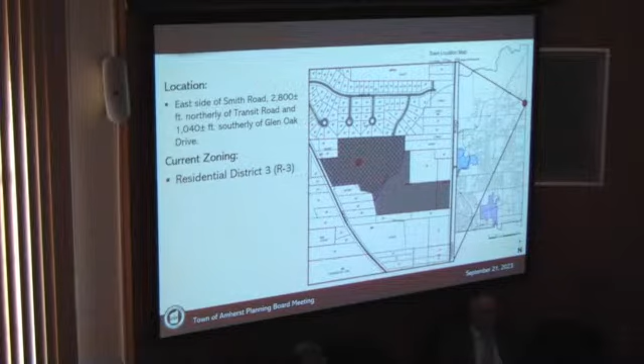You can see this is the site location. We're immediately adjacent to the Ruby Lane, Glen Oak, and Ransom Oaks area, just to the north. The parcel in question is the hatched parcel to the west. DJC Land owns all of that gray area extending out to Transit Road. We will eventually come in for a site plan for the eastern portion, but under consideration tonight is solely the western half of the property.

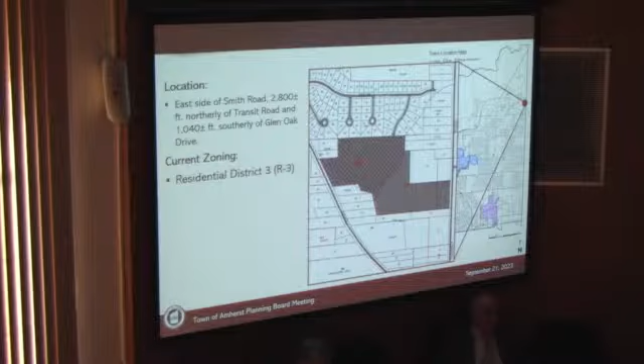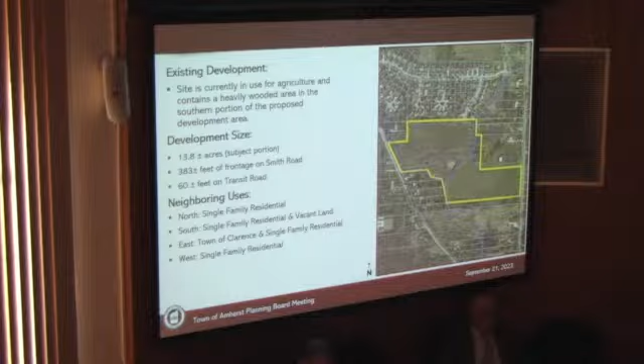This aerial image shows the neighboring uses are largely single-family residential. We're proposing pretty much the same exact thing, so it will be in continuity with the adjacent development.

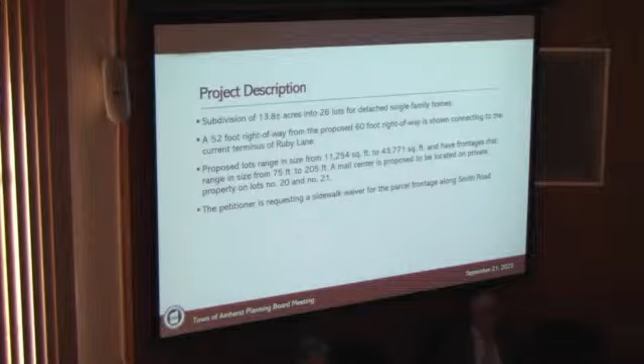This project is about 13.8 acres. We've divided it up into 26 lots, and we'll move along on this one so we can see the layout.

As part of the request tonight, we are asking for a sidewalk waiver. This would be solely along Smith Road. We have sidewalks within the development throughout all the lot frontages, as well as connecting to Ruby Lane. But we are asking for a waiver for the sidewalk along Smith Road, just because there is no existing sidewalk out there at all.

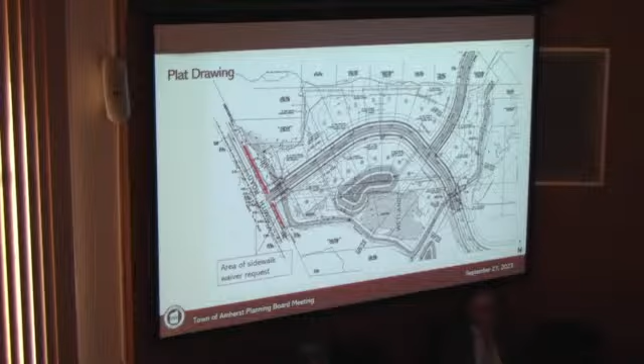We have received support from the town itself, from the traffic safety coordinator and town engineering department. They agreed with our assessment that sidewalks would not be necessary along Smith Road. Aside from the fact that there are no sidewalks on Smith, they also noted there are various obstacles, utility poles, a ditch immediately adjacent to it, as well as other infrastructure that would make installation difficult.

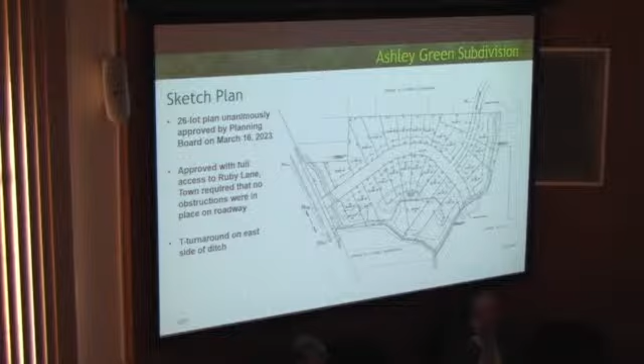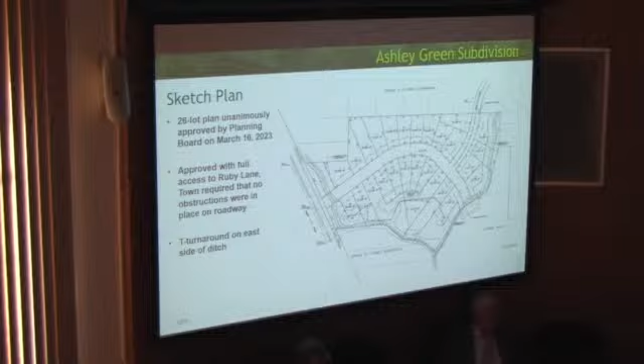So just to take you back, I know this board has seen this plan a number of times through the sketch plan and SEQR stages. It was drawn out before then too with the rezoning. The sketch plan shown here was approved by this board unanimously in March of this year. It was 26 lots connected to Ruby Lane, with the turnaround located just east of the ditch.

If you go to the next one, what we've presented as part of the preliminary plat is pretty much the same exact thing. There's really no difference between our sketch and our preliminary plat other than the fact that we've gone through the engineering and made whatever minor tweaks we've needed based on the proposed infrastructure.

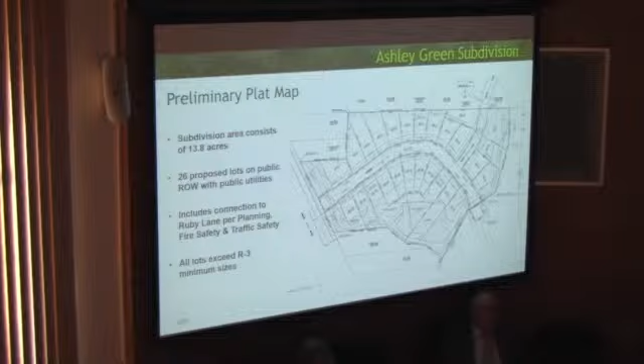You'll notice that the right-of-way at the ditch has been expanded a little bit. This is to accommodate the culvert so that both culverts are wholly within town public right-of-way areas, not going onto any private property. This does include the Ruby Lane connection. That was a point of discussion through the sketch plan stage, and we were required to put that in with no obstructions, no gates, full connectivity. All of our lots meet or exceed the R3 minimum sizes.

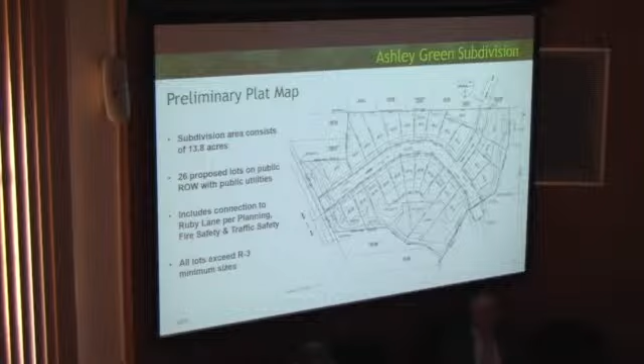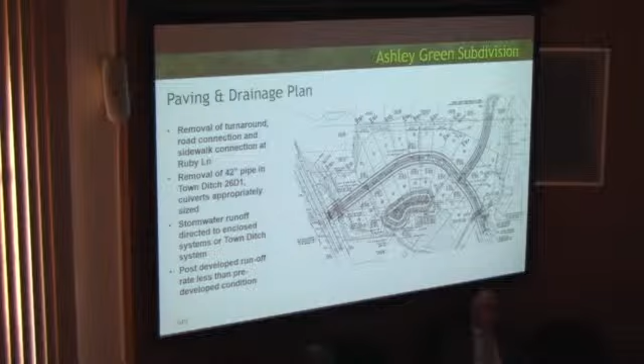Just to give a quick overview of the infrastructure and utilities associated with this development, above here is the paving and drainage plan. We are noting the connection to Ruby Lane. There's an existing turnaround there today; this turnaround will be removed. The land will be regraded and topsoiled. The sidewalk will be connected so that essentially you won't know that road ever ended.

We are also proposing removal of a 42-inch pipe on the town ditch. This is an existing pipe that was used by the farmer. It's essentially an obstruction at this point for that ditch system, narrowing it down. Our culverts proposed at the two crossing locations are much larger, about 5-6 feet wide, so removing that 42-inch pipe will help improve the drainage flow in that area.

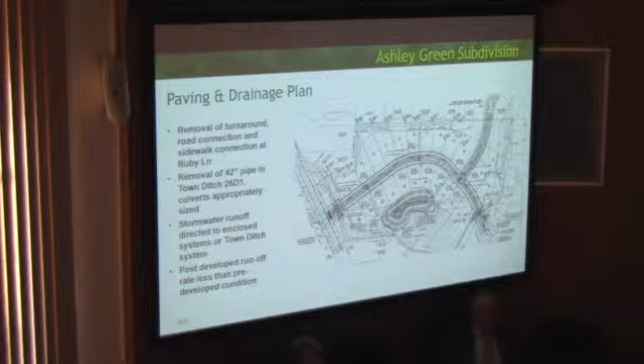Our culverts have been appropriately sized per floodplain calculations to meet and exceed the drainage flow through the ditch. All of our stormwater will be collected on site and distributed through an enclosed system to the pond at the southern portion of the site, which then outlets to the ditch.

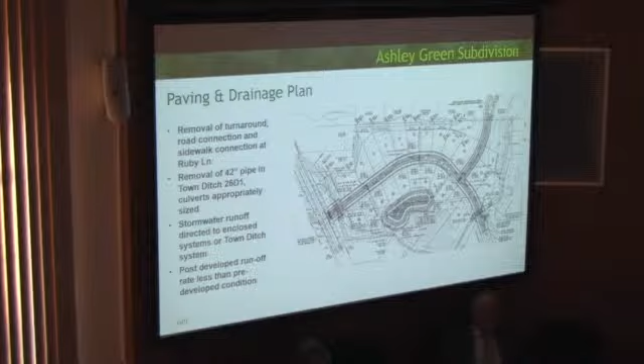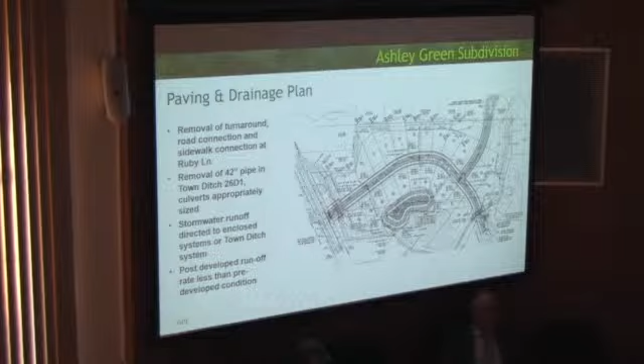All of our water is controlled through our outlet structure coming from the pond. Our post-developed runoff rate will be less than our pre-developed condition, so we're not increasing runoff on site. We are capturing all stormwater as required by the town. We have rear yard drainage which collects all the stormwater, so there should be no concerns over discharging stormwater onto adjoining properties.

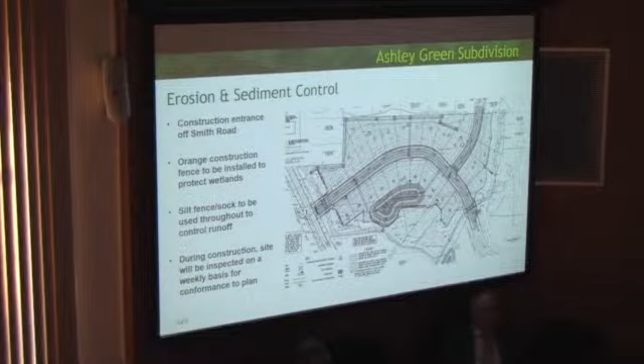The erosion sediment control plan shows a proposed area of disturbance. We are keeping the southern portion as well as the ditch buffer largely undisturbed. Our primary construction entrance will be off Smith Road.

We are not looking to access the site through the town roads. We will have orange construction fence located around critical areas such as the wetland and some of the area around the ditch itself. As site construction proceeds, we'll have a perimeter silt fence or silt sock installed to help prevent erosion and runoff onto adjoining properties. This is ensured through a practice of inspections. Given the size of the site, we'd anticipate this would be inspected once a week for conformance, making sure we're meeting the intent of the erosion and sediment control measures in place.

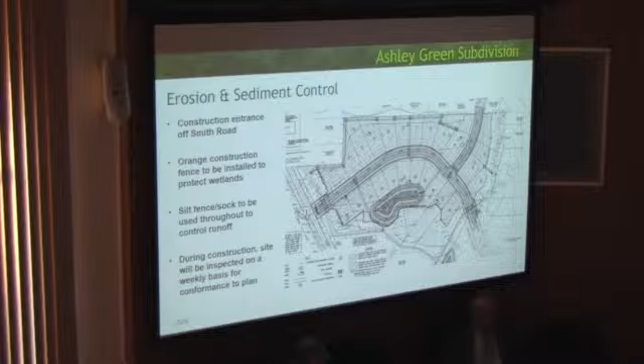Even if this board decides we're in a position to get preliminary plat approval tonight, we still require some additional outside approvals, as is usually the case with the Erie County Water Authority and Erie County Health Department. They'll be reviewing the water line and sanitary sewer line to make sure that meets their requirements. We'll have another opportunity to come back in front of this board one last time for final plat. Following any approval there, that would still require a PIP approval through the town, or Public Improvement Permit before any construction starts.

So while we're getting quite through the process and working out all these final details, we know we still have more to go, and there's another opportunity to be back in front of this board before final approval. With that, we are asking for a conditional approval of the preliminary plat tonight, and I can take any questions the board may have.

Brittany, any questions? No questions. Herb? No. Joseph? No questions. Is there anybody from the audience who'd like to speak on this? If so, please come forward.